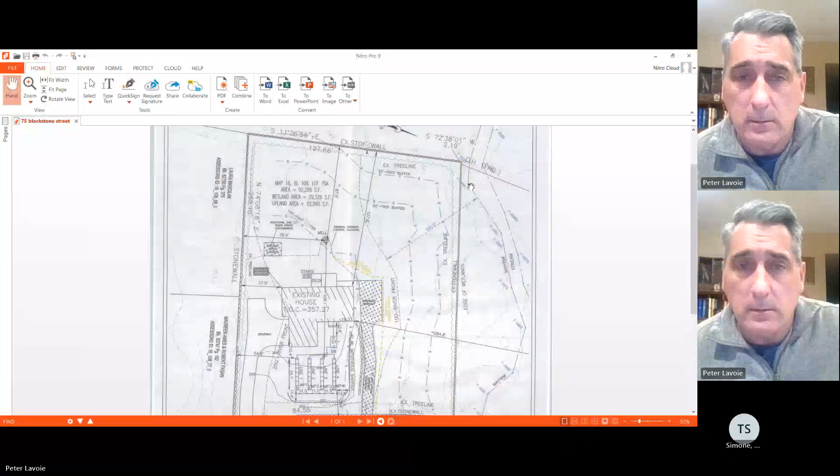So, can everyone see the plan? We also have paper copies. Okay, so the project is located at 75 Blackstone Street. Blackstone Street runs along the bottom of the page. We were here in 2022 for the builder, for Kevin Lobiser. We did get a certificate of compliance at the end of 2024. So currently what exists on the lot is the existing house, in the center of the lot.

There is an existing driveway to the left. It's an attached garage, so the driveway to the left accesses the garage on the left of the house. We have an existing septic system in the front yard, existing well in the backyard, and the rest of the lot, as you can see, is a field with a stone wall that wraps around the lot, and the tree line is probably 4 feet off of that stone wall. So that area is currently a field.

So why we're here tonight is my applicant would like to construct a second driveway to the right of the stone wall and the right of the house. He has 2 garage doors on the lower level, so this is kind of like a drive-under on this side. All the work is outside of the 100-foot riverfront area. We did revise the plan from the one I originally submitted to the board because we had the driveway much further down and also within the riverfront area.

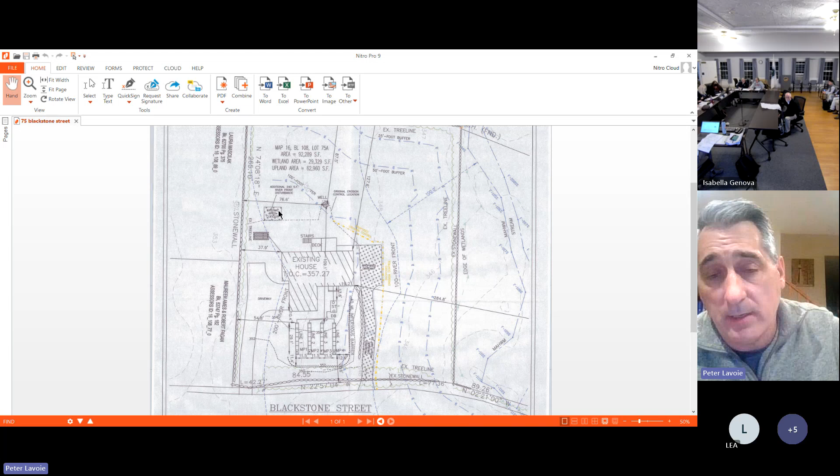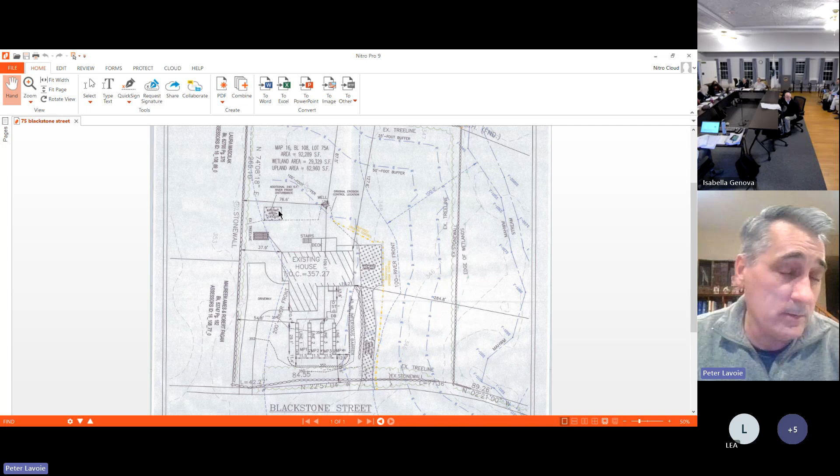And also there is a 20 by 12 shed in the backyard. That was on the as-built that we submitted for the certificate of compliance, but it was not originally on the original notice of intent. So with this additional disturbance, roughly 1,036 square feet for the driveway and 240 square feet for the shed, we come out to roughly 10% riverfront disturbance. So I added a table to the plan, below, showing the new NOI disturbance compared to the original NOI. Originally we had 8.7% that we were disturbing of the riverfront. We had no disturbance within the 100-foot riverfront, but we had disturbance within the outer 100-foot. So we do increase disturbance, but we are still below that 10% that is allowed.

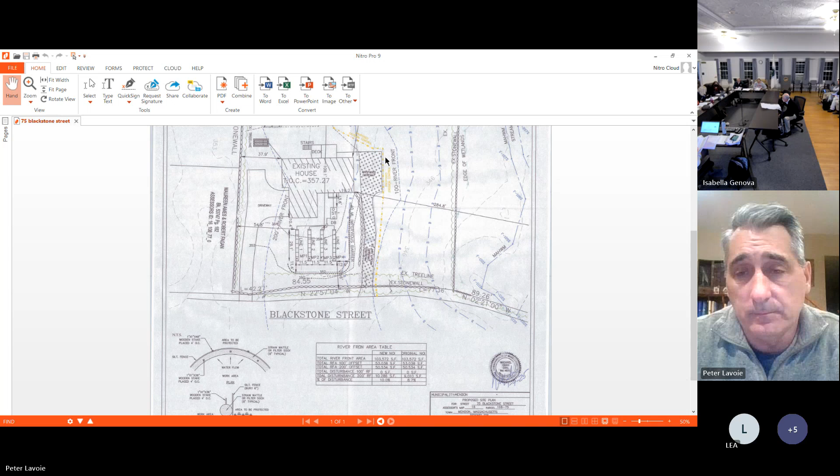So that's the reason why we're here tonight, is to get the approval on constructing that driveway to the right. That's basically it.

First thing I'll raise is DEP issued comments on this project. Did you review their comments, and could you respond to them? I did review their comments. We have updated the filing fee.

So we have sent the additional fees. I dropped off the additional fees to Isabella today, and we also mailed out the additional fees on Monday to DEP. I also did an alternative analysis that they had asked for, which I had submitted.

Originally, and it looks like we're doing alternative 2 out of the 3 alternatives. We had 3 alternatives: one, we do nothing, but my applicant really needs this driveway to get to the lower garage. The second one was what I presented today, moving the driveway as close as we could to the septic area, coming in, and still being below that 10%.

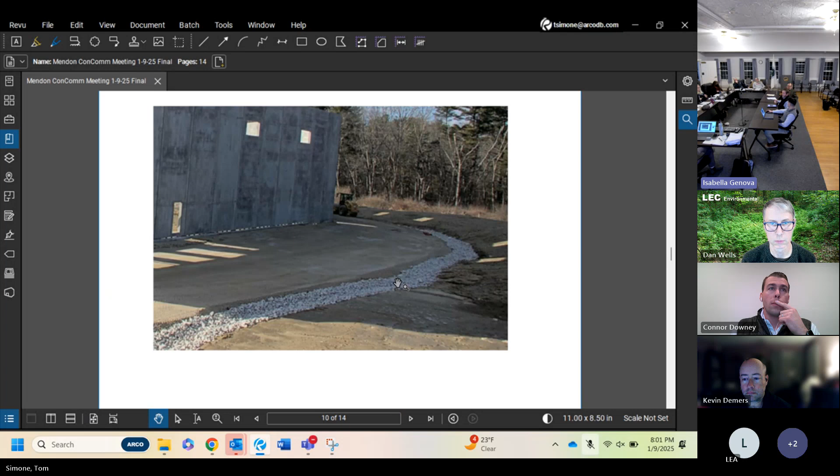So in this photo here, originally we just put some check dams, and then we installed this more robust swale.

Then additional actions, a lot of these again you'll see in the Shane's visit. We got these verbally, we started acting on them. Shane recommended additional soil stabilization of the areas around the retaining wall base, around the site's southern perimeter and the eastern parking lot slopes.

As of today, we have all our topsoil on all these slopes. Tomorrow, weather permitting, we're going to seed and then put erosion matting over all these slopes. That should drastically cut down on any sediment transmission around the site. The seed will just be dormant until the growing season.

Under the ground, well they call it snow seeding sometimes, it's just how it goes. What are you going to put over the seed? Erosion control mats. Erosion control matting. Okay, so it's going to be that kind of greenish kind of material.

Material will be like a combo straw matting. Pin down, and then pin through it as long as we can break through the frozen ground. Tomorrow being at 40 degrees.

Leah is our expert on invasive and native species and other botany issues. What kind of seed mix are you planning on? It is a winterized mix that we have, I have to get the specific name, just like a landscaper mix or something, meant for germinating a little bit earlier than our final seed mix.

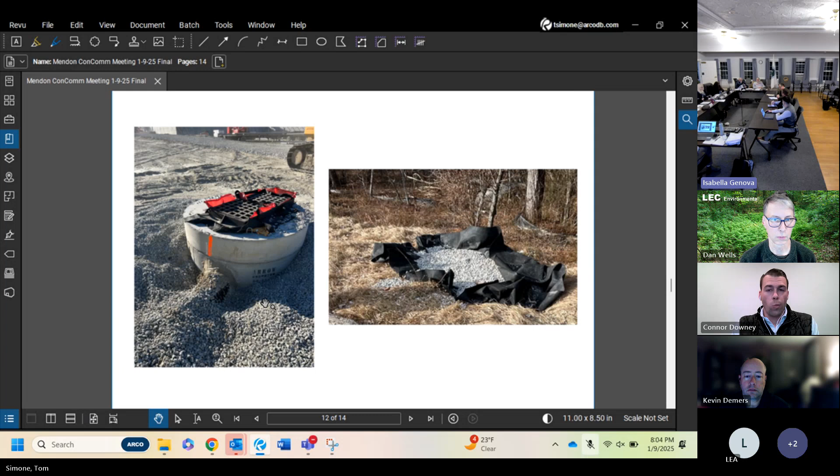Let's go through some pictures. One of the main things we'll also read about in the Shank's report is this structure right here. On the 12/11 event, we didn't have all of that base around that basin, nor did we have our grout finished at this pipe connection, so sediment during that 12/11 event was able to get in here and needed to be cleaned out.

This picture on the right-hand side, you'll see in the Shank's report, is a photo of a hole. That's the hole being lined and filled. The photo on the left is just an example of one of the areas of stabilization that the Shank recommended.

Then the photo on the right, there were concerns when we were all standing in the building pad - we're obviously not ready to pour concrete just yet, so it's still just kind of muddy in there. One concern was that sediment could migrate down the slope towards the backfill zone and out underneath the panels. So the team, a little bit out of sequence, grouted the bottom of all the panels to act as a stop for any sediment leading into the southern parking area.

Question - back to the deep manholes, did you end up measuring the depth of silt and cleaning them out? We cleaned them out, I don't know if we measured - yeah, we did not measure them. We pretty much got them cleaned that afternoon, plus Monday and Tuesday of this week, right off the bat getting that cleaned out. We did not measure what we had down.

Wasn't that one of the recommendations from the Shank, to give an estimate or measurement of the amount of silt in them? We had just got the report today. When we were with the Shank, the loud and clear message was just get it done. So was the silt all the way up to the bottom of the outflow pipe, or how much would you assume? It was not up to the pipe that was leaving. The main structure that was photographed there, where we did identify an area that was not grouted around the pipe, there was significant enough sediment to shovel out of that structure.

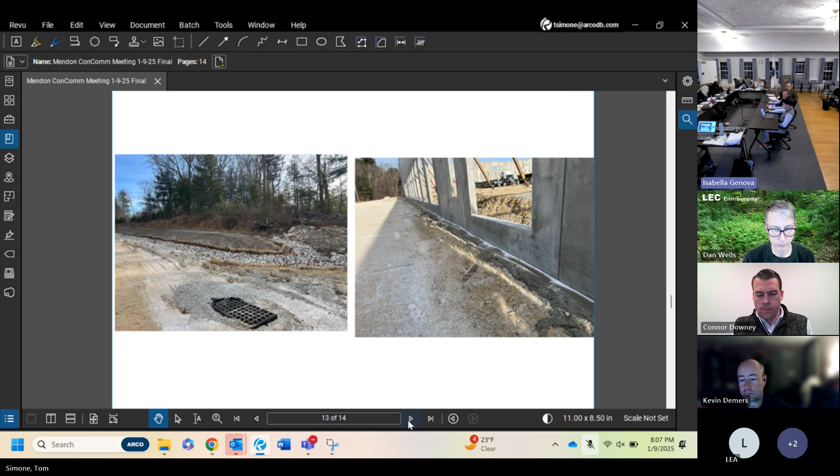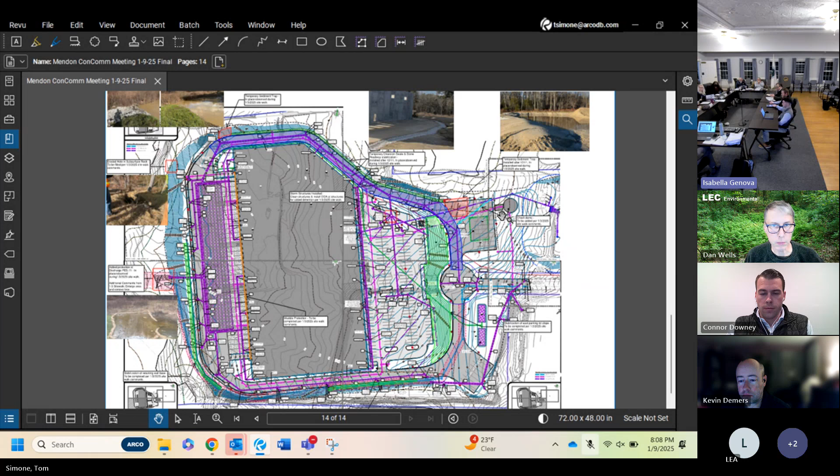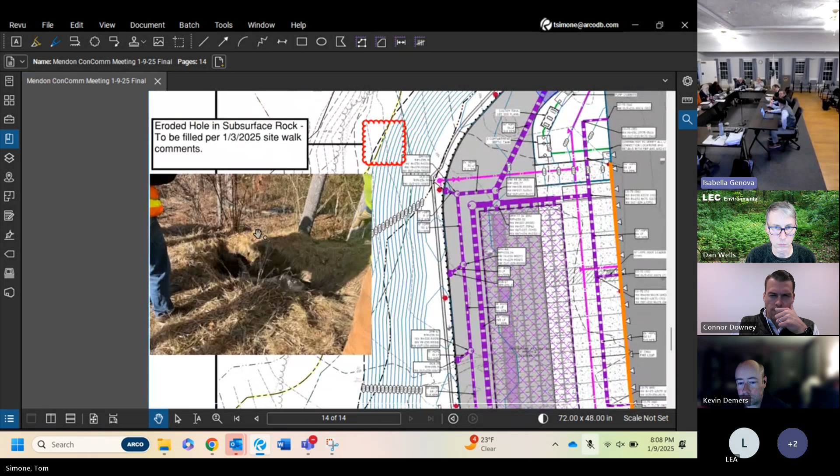Mr. Kaufman, if you look in the upper left-hand corner, there's a red box just above the photograph - that's the location. Right, now he's marked this sinkhole, but it is beyond the buffer for the erosion control, right? So that's the problem to me. Is the water getting there internally, or did it get over what caused that sinkhole?

From observation, I think this is a historic problem, not a new one, based on what's being observed. Inside the hole, for example, there were a lot of mosses and other fragile plants that didn't seem to be disturbed by any recent water.

I'm wondering if that was a filled area - usually that's a sign that it got filled and didn't get compacted, and eventually it's going to wash out. That predated the project, but it's outside of the work area. But now that's where the erosion's popping up, so you've got to do work there. It's just a red flag.

There's a couple of mature trees on it, doesn't look like it was filled before. Well, how many years ago? It doesn't take long to grow moss. No, but it doesn't take long to wipe it off either. So it doesn't appear to have been a place where there has been substantial water flows washing it out. That's why.

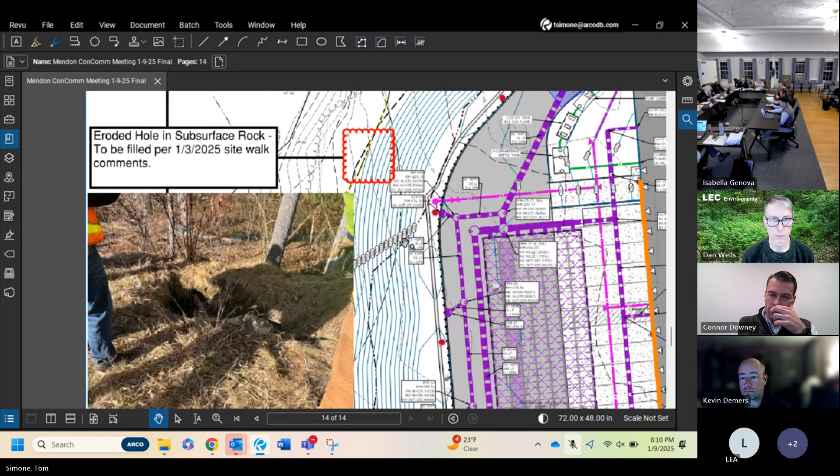The very last comment I'll offer is we've stopped putting stormwater pipe in, we've stopped putting the fire hydrant line in. We're pretty much past the most disturbing part of the project on site. If we're allowed to resume those activities, we're marching right towards paving and further stabilization and improvements. All the major cuts and fills are done.

Wouldn't paving actually increase the amount of water flow? Paving would help us better control both the water flow and sediment migration across the site - we'd be able to direct water better, and there'd be nothing for the water to bring along with it. It would encapsulate it, but pavement also does speed up water as well. We'd be able to rely on Desheng as our expert to say whether, once they pave and the velocity increases, their infrastructure would be able to contain the faster velocity.

Are all the panels up right now? No, sir, about 85%, 27 left. Are these poured in place or are you importing them? No, these are precast wall panels from Fab. So the general order of operations is we finish most of our precast panels - we might leave a couple out for access into the main building pad area.

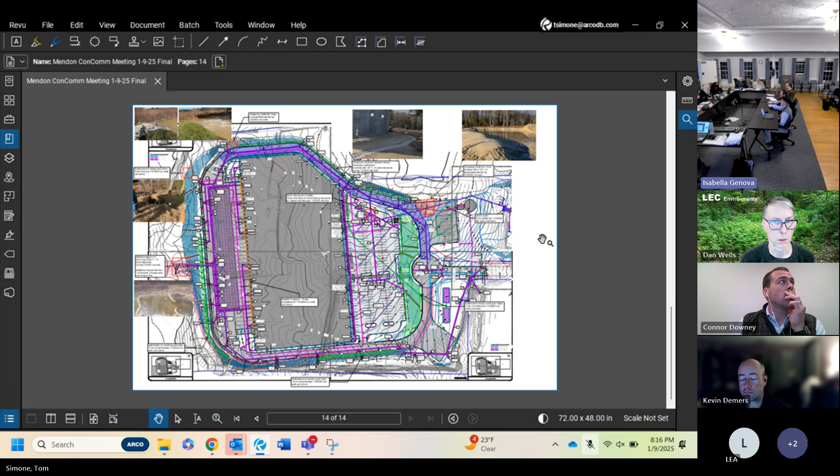Okay, so now I need to do my formal legal explanation for the other commissioners who changed and also for the citizens. At the December 26th meeting, the expectation was that the commission was issuing an enforcement order to stop work for everything on site. We got a response from the property owner, and I consulted with Town Counsel Carris North, and her advice guided my decision. I decided that because of the uncertainty as to the jurisdiction of the ConCom -- whether we could issue a stop work order for the entire site as a result of the stormwater issue and not restricted to stormwater -- that I would modify the enforcement order to allow them to continue work strictly within the building pad.

They sent us an email at the time laying out what they were doing. Carris North reviewed this. I discussed the matter with her, and we agreed -- as chair, I agreed -- that the contracting and the work you just described could take place. That email is available for the commission, and if interested, we can make that available to citizens as well.

So that is why I took an action as chair, because it was not something where we'd be able to have another meeting before it would impact their workflow. Karis, I had hoped she would be here tonight to clarify, but she's traveling at this moment and wasn't able to make it. I've been working with our town administrator, Jeremy, and Isabella, and my expectation is that we'll work with Karis so at a future meeting she can come and we'll discuss exactly when and under what conditions we can issue a stop work order, not just for stormwater aspects, for an entire development site. So in this case, guided by town counsel, I...

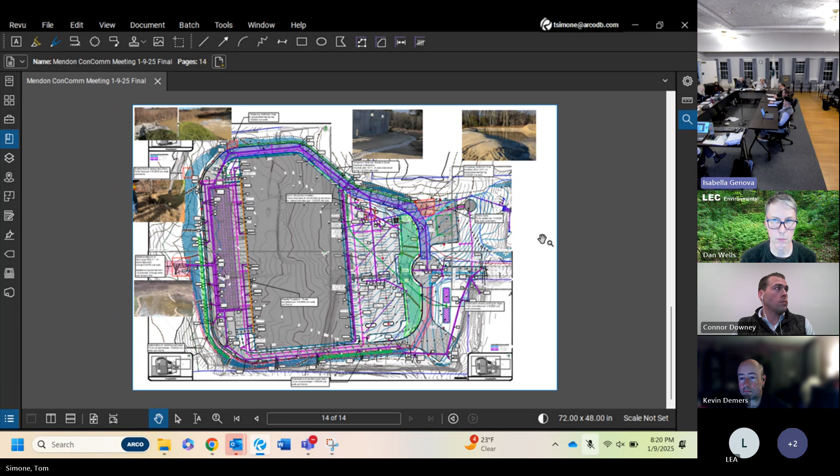So with that, if there are no further questions, we can move on to a presentation of Desheng's report. Isabella, are you able to bring that up? You all have it, yeah, it's in our packet, but you can bring it up for the recording and for people. Did you print out all of the pictures as well? No. Does anyone need a copy?

I've got one on my computer. They have the first two pages, and the rest of it are going to be the pictures that Isabella will be putting up on the screen.

As Sean said, we all met on site last Friday. The chief was there, and his report encompasses everything we talked about. He gave some background on the site and talked about the different areas we inspected. We looked at the flared end of the outfall, the subsurface infiltration system, and I think the main takeaway from Desheng is that that outfall shouldn't have had stormwater coming out, because that's the final stormwater system.

So during construction, water isn't being diverted there. So the fact that water is coming out of it and that it's turbid was what led us to go around and try to figure out which catch basins or manholes were leaking or not sealed entirely. As Sean said, they found one catch basin that they identified, cleaned, and got sealed. The other ones, a lot of this is just describing what we saw.

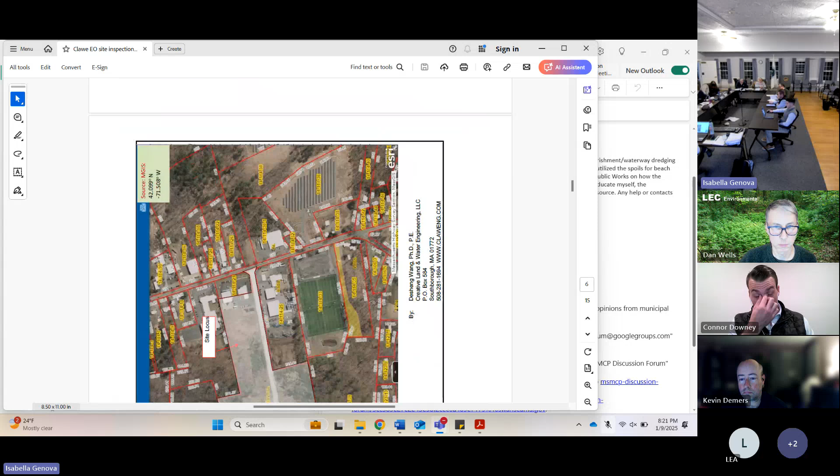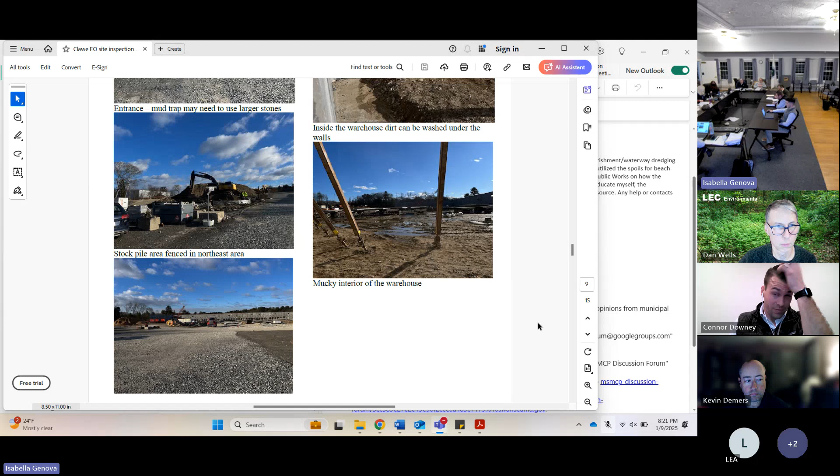Now, that's 1/16 of an inch of silt. I would not call that a thin layer of silt. You wouldn't call 1/16 of an inch thin? No, a quarter would be. But 1/16 of an inch is thin. I'm not going to get into an argument about metrics, but it's significant—1/16 of an inch for 200 feet, over how wide? I wouldn't just say it's stained leaves. To leave 1/16 of an inch, that's more than staining, is my point.

If I could, Mr. Coughlin, Desheng's observation is that was the thickest area. Having been there, I think what we mostly observed was that large portions of the area had none, some had staining, and some were as thick as 1/16 of an inch. That's this area.

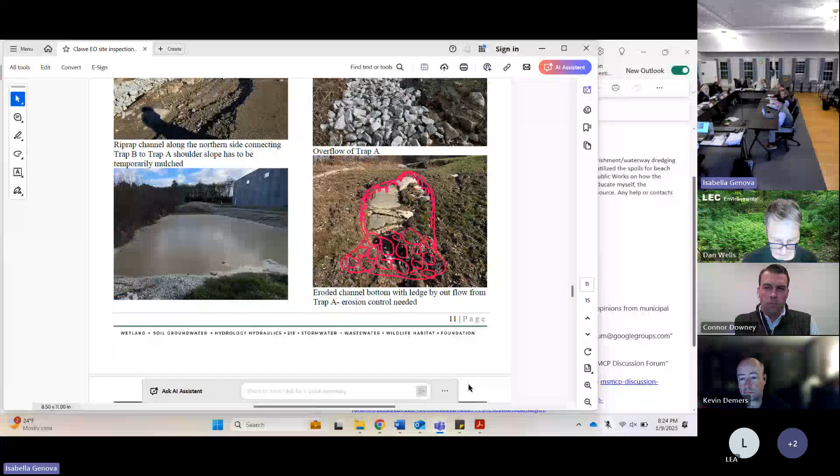This is the ledge that's below, in the northwest corner of the site. So you need to explain that the ledge is below—doesn't one cancel out the other if it's ledge? Here's the photo: the ledge is below, it's down gradient. You can see the grass coverage has eroded where that ledge is—I don't know if that was placed and seeded. We did believe we loamed and seeded that, but we just couldn't get a thick enough layer of loam. It's hard to grow things on rock because it gets really hot and really dry.

There was a water flow there, and erosion basically wiped out what was the top of that ledge. It would make sense—you can fry an egg on it pretty easily, but growing stuff is hard. I believe Deshang's suggestion was that we pull back some of the soils and try to stabilize them, since otherwise it's just adding stone there and leaving it exposed.

Okay, other questions? I'll ask something I've been wondering about since the December 16th rain event. I agree there was a lot of rain right after a thaw, but when you did the stormwater management plan with the planning board, you said it was designed for a 100-year storm. So were there specific things done on-site, or done incorrectly, that led to the siltation and fines flowing in during the December storms? Because that wasn't a 100-year storm. No, it wasn't.

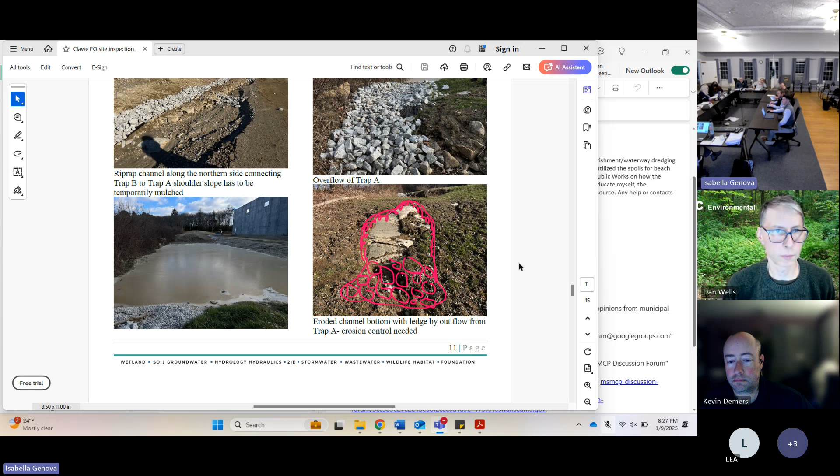Go on over and show it. Do you have a report? How much you can have, where are your settling areas? Two here and one there?

No, these are not settling areas on here. This is what this trap B that Shane pulled out here. That was our trap B. Yeah, that was one of the items after I kind of... we're talking about this area here.

Okay, so does the plan call for a settling area during construction? Yeah, Tom can speak to that. It basically, it's a fill area. We're noting it as trap B there, in the location where that's placed. The bowl that's being mentioned, I believe, is down towards that spider webbing of storm structures that we have there.

That corner calls for a sediment trap. Part of what we were constructing in that area, again referenced as the bowl over there, was fill placement that took place from early on. Later into the project, as we got into installing the storm system, that's where your water was being trapped. So we started to disturb to put that line of storm in, and that shift in trap B location was the new location to intercept that water, which was previously being stored in that spider web area of storm structures.

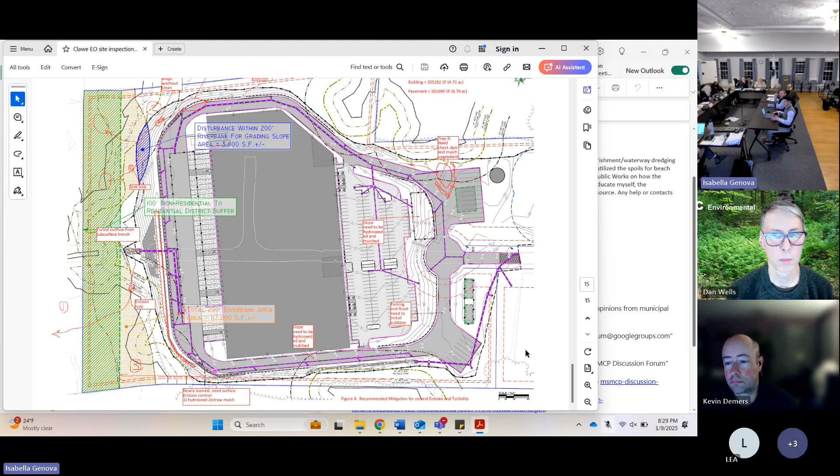So during the time of installing that and the transfer of where we were going to be trapping and detaining water on site, that's right around that 11th time frame. Okay, so given that we have identified a gap in your planning and implementation...

I believe one of the things we can add when we modify the enforcement order is that we would request that Deshang be working closely with your people as you're moving dirt from place to place, to make sure you don't get caught with your pants down again. He would be there to advise you on local conditions and work with the engineers because of his expertise in stormwater management and siltation control.

So does that seem like a reasonable thing to be asking them to pay Deshang for? Okay, well, they are. Yep. I'm glad that you're as impressed by him as we are.